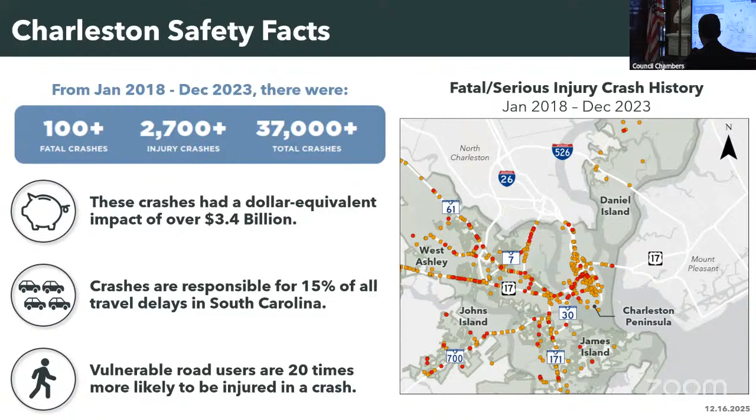You can see on the map there, that's not all crashes, that's just the fatal and serious injury crashes that occurred within the city over that 6-year period. The map is pretty well saturated with dots, which really speaks to how large of an issue this is for the city. Just to add, in 2024, since we hadn't studied that period as part of the plan development—since we started developing this plan last year—an additional 81 people were involved in fatal or serious injury crashes across the city.

Back in October, I think it was, the city passed a Target Zero resolution, which aligns with SCDOT's broader vision for eliminating fatalities and serious injuries statewide. That commits the city to substantially eliminating all fatalities and serious injuries by 2050.

So what we did through the plan, to wrap it into a nutshell, first off we reviewed the state of safety in Charleston, which is what I just got finished summarizing. That's taking crash history and providing a summary of what we're seeing, where we're seeing crashes occur, and what the severity of those crashes are.

Using that data, we defined and narrowed in on the high crash and high risk locations. We know that crashes are occurring everywhere, but where can we get the most bang for our buck in investing in safety improvements across the city?

After identifying those locations, we identified a short list of safety countermeasures to ultimately feed into, as James mentioned, future applications for additional funding through various programs through USDOT, as well as other programs across the region, such as the transportation sales tax that'll be back on the ballot again, and other programming efforts.

And developing a plan for implementation is the last piece of what this plan does, and that's the most important piece. We don't want this to be a plan that just sits on a shelf. I know James said this is the last you'll hear of it. Hopefully it's not, because we'll then actually implement the actions and projects that were identified in the plan.

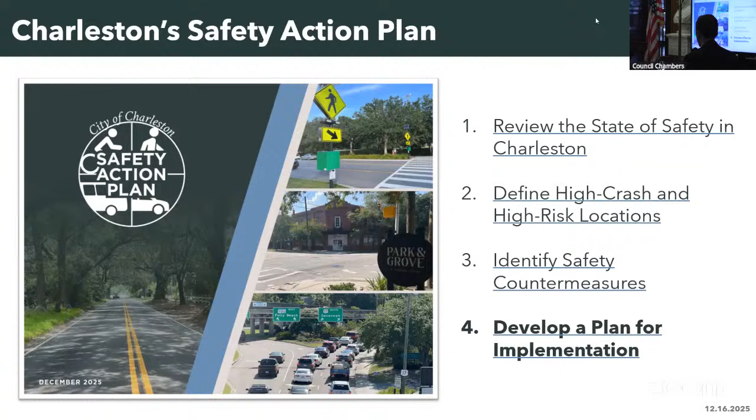The city has already applied for what we call a demonstration grant, which is a smaller amount of money to pilot some of the strategies identified in this plan at various locations across the city. We still haven't heard back from that. I think with the government shutdown and whatnot, things have moved a little bit more slowly than typical for USDOT, but everything we've heard on our end working with our partners is that those awards should be announced soon. So hopefully the city's in line to receive that funding. That'll kind of be the initial stages of getting some of these projects on the ground.

And then next year, there's one more round of funding available through this Safe Streets and Roads for All program that the city will then be positioned to apply for an implementation grant, which is actually the construction funding for these projects. The hope is also that this program will continue into the future.

That's not yet been established, but again, everything that we're hearing from our partners is that this program will certainly continue into the future. It's just how exactly that looks might be shifting with there having been an administration change since the program started in 2021.

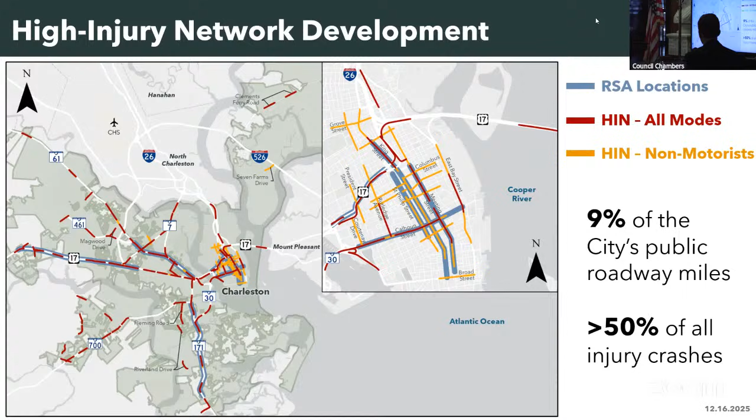And so that's the purpose of the recommendations that came out of this. Together, we've got 2 buckets of recommendations that came through the plan. We've got our engineering countermeasures, which are more of your traditional construction projects, things we need to go out and build to improve our roadways and our pedestrian and cyclist facilities. We've got 52 of those projects at various locations across the city recommended as part of the plan.

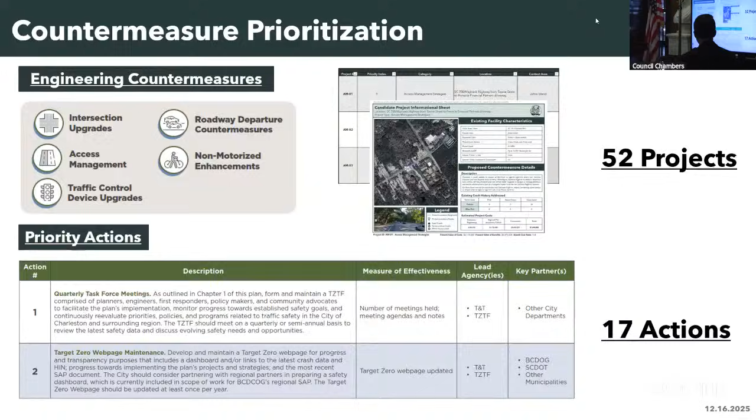So just to provide one example, the plan will be publicly posted online, so anybody will be able to access the entire document, which will summarize all of this in detail. But just to provide one example, and I chose this because it ties into that demonstration project that the city is already pursuing funding for.

Some of the locations that fell out in this category were pedestrian and bicyclist improvements on Magwood Drive and SC 61 in West Ashley, and then along the East Bay Street corridor downtown, as well as in the East Side, North Central, and West Side neighborhoods on the peninsula.

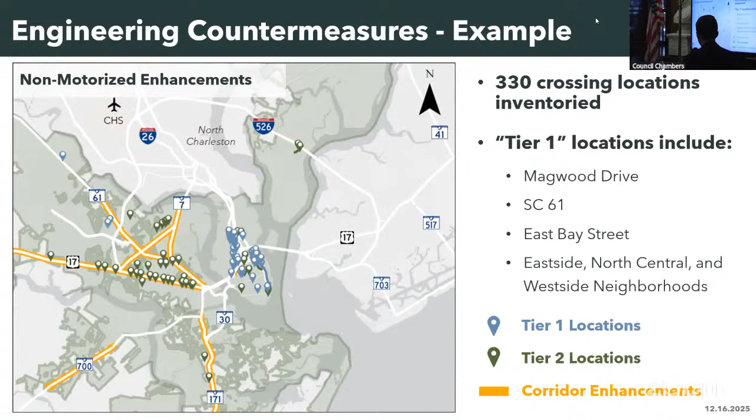And I think that last bullet is a few of those locations where the demonstration project is looking at improvements to pedestrian crossings. So in the plan, the way that it's arranged, if you were to review it, you would see just that.

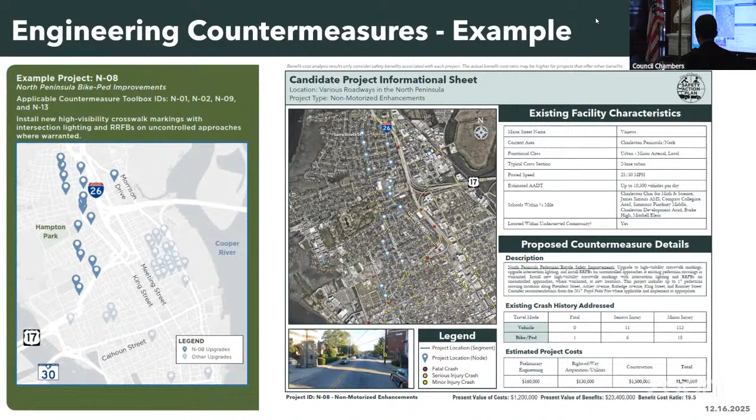You're not meant to be able to read this, but every single one of those 52 projects gets a sheet summarizing where it is, the crash history that's been experienced there, what the project is that we're proposing, and all of the costs anticipated as part of that project from design through construction, as well as a benefit cost ratio — what are we expecting to get in return for implementing this project?

So that's all I have for today. Any questions? Thank you very much. Thank you for your hard work on this. Any questions from any member of the committee?

Over the past year, we've been tasked with retiming signals, predominantly Maybank Highway and Folly Road were the two main corridors identified, but it also included Harborview Road as well as the Fielding Connector. In all, it was 30 traffic signals.

We separated into 7 corridors or areas: Lower Maybank in the bottom left of the screen, which is Maybank and Main Road and also Brownswood and Main Road, then the Upper Maybank corridor from River Road up to Woodland Shores, and then the 5 signals there we call them Folly Triangle.

It's a corridor there, which is the 5 signals at Folly and Maybank, and then your Windemere Triangle area where those routes come together, and then Fielding Connector with the 2 signals near Porter-Gaud, and then the Folly Road corridor, the longest one, from Fort Johnson Road up to Harborview Road.

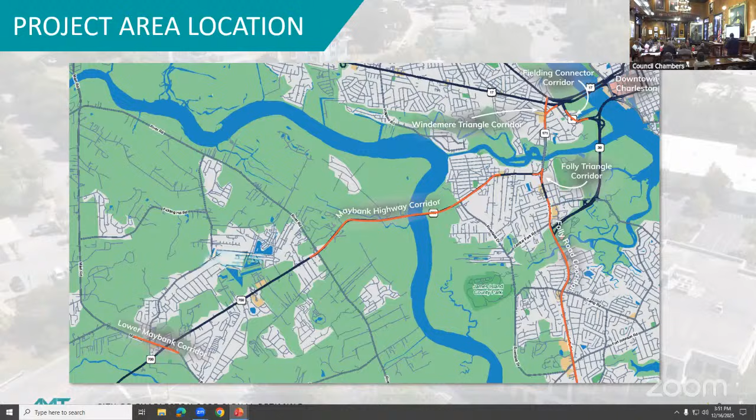The first thing is understanding the problem and understanding what our goals and objectives are. There's a similar list here that you'll see in a lot of other large capacity projects, which is improve traffic flow, reduce congestion throughout the corridor, decrease travel times, increase the average travel speed in a congested environment.

Obviously not above the speed limit, but when you're seeing low speeds because of congestion, we want to improve upon that and reduce delay — reduce how long you're sitting at those signals and throughout the corridor.

Retiming signals and coordinating signals throughout a corridor is probably the most cost-effective way of making improvements. If you compare it to large capacity improvements, which cost millions and millions of dollars, this is pennies compared to that cost. So it's very important to do this routinely.

I would say probably a 3 to 4 year cycle is the industry standard. So it was a much needed project within these corridors.

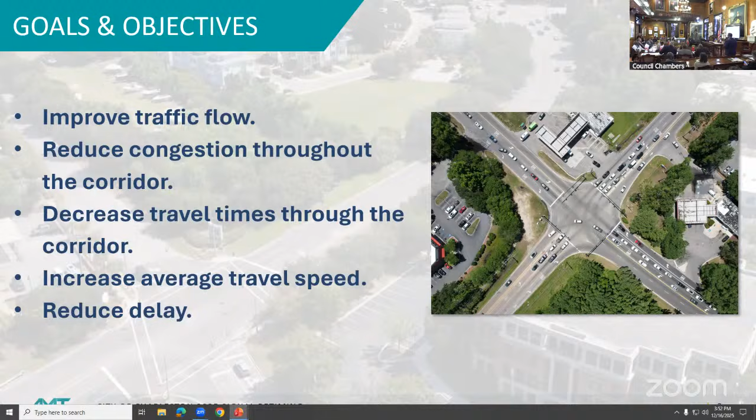As engineers do, data is what drives us. So the first thing we did was office data collection — understanding what data is readily available.

We researched and analyzed development reports for different developments along each of the corridors, such as traffic impact analyses, identifying compounding features such as the Wappoo Cut Drawbridge that impacts the Folly Road Triangle, large traffic generators coming into play, and complicated intersections.

Obviously Maybank and River Road and Fenwick — these are complicated corridors. These were not easy corridors to retime and coordinate. And then it's collecting all of the available signal plans and the controller data that's out there.

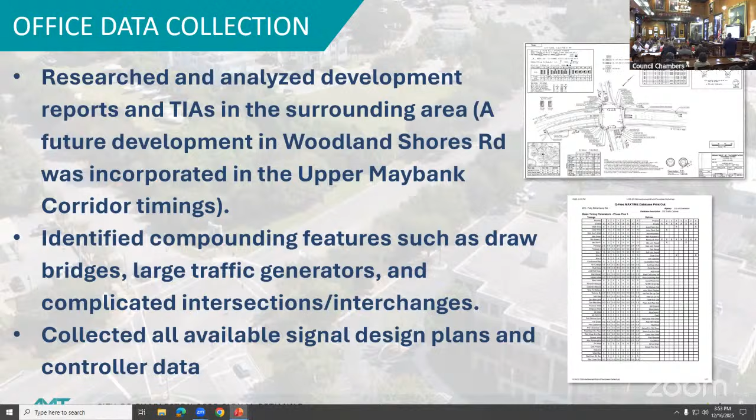Then it turns to the field data collection process, and this is where we did a lot of work. Our technicians and engineers within our office were able to go out and go through the controller boxes.

This is an opportunity for us to look at the operations, understand if there's hardware that needs to be replaced, or faulty things. We're able to do an assessment of the current conditions and provide recommendations for improvements.

We collect turning movement counts at the intersections. We do travel time runs throughout the corridors. And then one of the things we do is collect drone imagery at the corridors.

This is an opportunity for us to get a bird's eye view of that intersection, but also the other intersections upstream and downstream. We're able to see how traffic progresses through those signals and along the corridor — is it working currently, or not? How can we improve there?

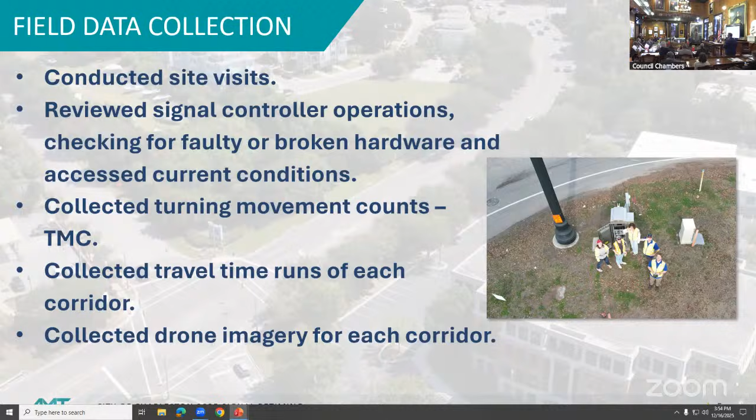The signal timing process itself is a bit iterative — this is the FHWA chart here, but we all do it kind of similarly, with some uniqueness to our process. It's really an iterative process.

We do the data collection, and then use that data to create models, and that's where we use a lot of the drone imagery as well, those videos, to really calibrate our models so we know we have a very accurate representation of what you see every day in the field.

Then we develop traffic timing plans from that, and we go back and forth with modeled traffic timing plans until we feel like we have the best signal plan we can implement. Then we sit down with the city staff and go through that, have a go/no-go meeting, and decide whether we're ready to go.

And then it becomes time for implementation and fine-tuning. And that's where you get, I think, a lot of bang for your buck. We also, once again, use drone imagery and video during this implementation phase.

We'll have typically two folks in the field doing this. One's manning the drone while the other one is, I'll say, tinkering or fine-tuning, making sure that what we implement and making tweaks, we can see the impact of those tweaks in real time.

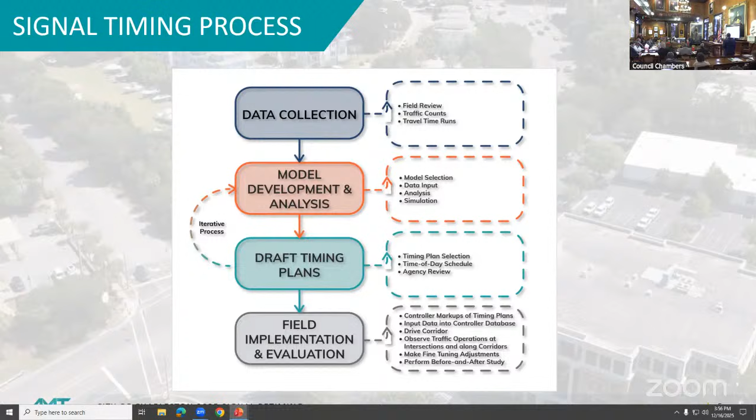So I'll dig into the results here. These are in alphabetical order. Fielding Connector had two signals there, the Ripley Point Drive and the Croghan Spur Road.

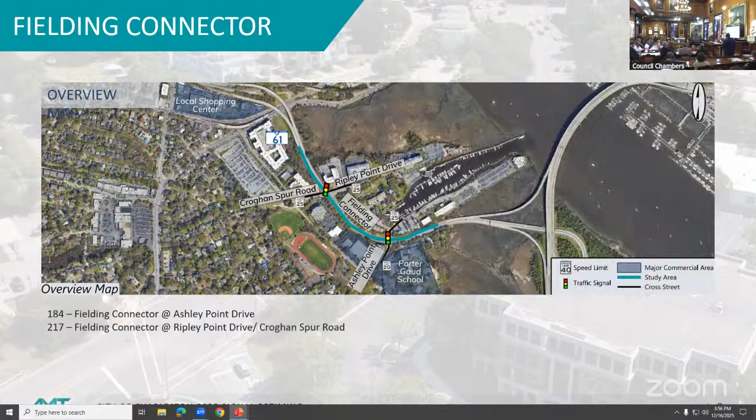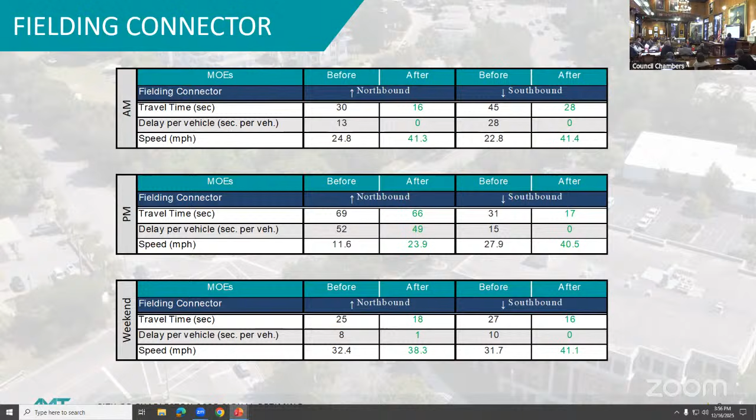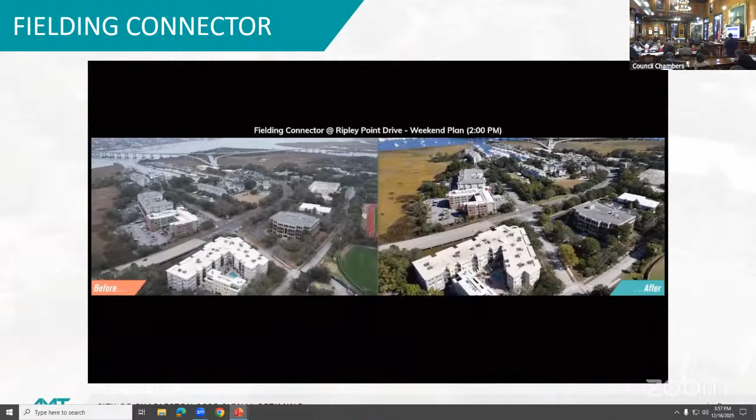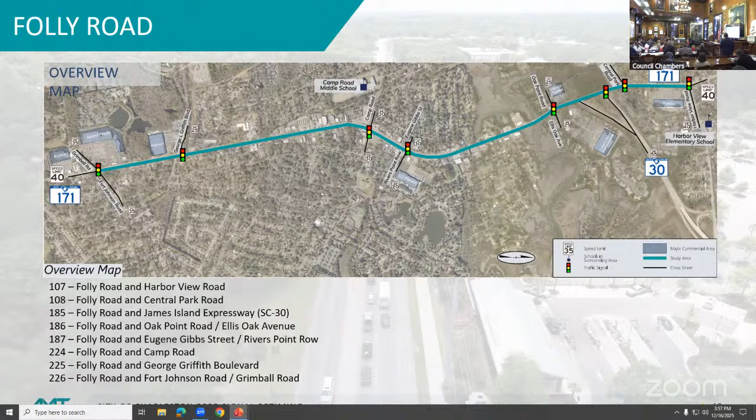Folly Road being the, let's say, the longest, had 8 signals along that corridor, like I said, from Harbor View Road up to, or down to, Fort Johnson Road. We also included the James Island Expressway, that southbound movement that you see there.

So you'll see some red here on the southbound movement along Folly Road. However, that was really more of a balancing of the traffic, not necessarily a negative. It's more of a balancing act between the travel directions there. But what it allowed us to do by giving some priority to the James Island Expressway was significantly reduce the travel time of that southbound left turn off the James Island Expressway.

So you just extended the time of the green light coming off the connector onto Folly Road? Extended the time, or reduced the number, or reduced the length of some of the cycle lengths. So it allowed us to phase through those quicker and push more traffic through.

And this one's an interesting one because you've got close proximity to each other. You've got Central Park Road, the James Island Expressway, and then you hit Ellis Oak. One of the recommendations we have in the report there at Ellis Oak is to change some of the signals. We've got protected left turns there at Ellis Oak that we could remove, and you'll find some more efficiencies within that Folly Road corridor as well.

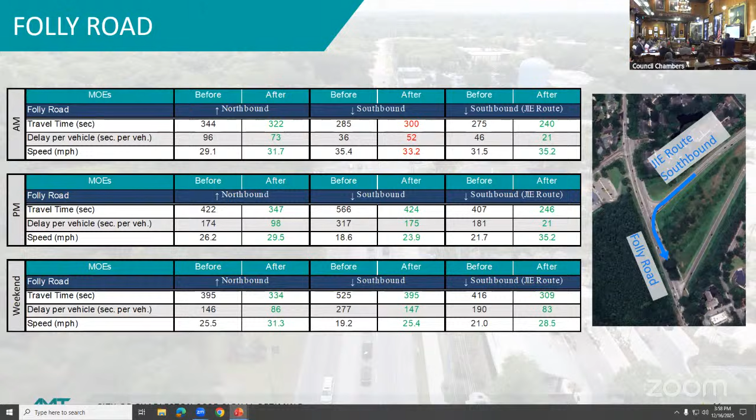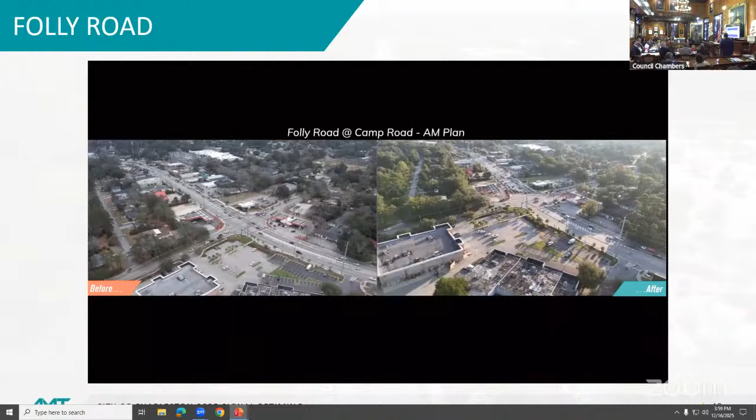This is the AM plan at Folly and Camp Road. And what you see here, you'll see that platoon of traffic that just left Camp Road along Folly. They'll continue to progress past Rivers Point Row and beyond without that continuous stop at each of the intersections.

The Folly Triangle, and this is why I'll give some credit to Tarcisio. This was his baby, and this was a complicated five-signal interchange, if you will. It's like Dante's Inferno. I mean, how do you get in and out of there? Tarcisio was able to squeeze out a lot of efficiency out of this intersection, this interchange.

He made some tweaks there. We've done a number of things, and it's also been impacted by the closure of Central Park Road. There's a lot of traffic that makes a right off of James Island Expressway, left on Central, all the way down to Riverland Drive.

And so during the time of that closure, this area here, Maybank, got a lot more traffic. And now that it's open, I think it's starting - James and I were talking about this before - it's starting to see a shift back to Central, but not as much as we expect it will in the future.

So Central Park Road's closing up again, right, after the holidays? It's open now for good? Oh, open for good, wow. All right.

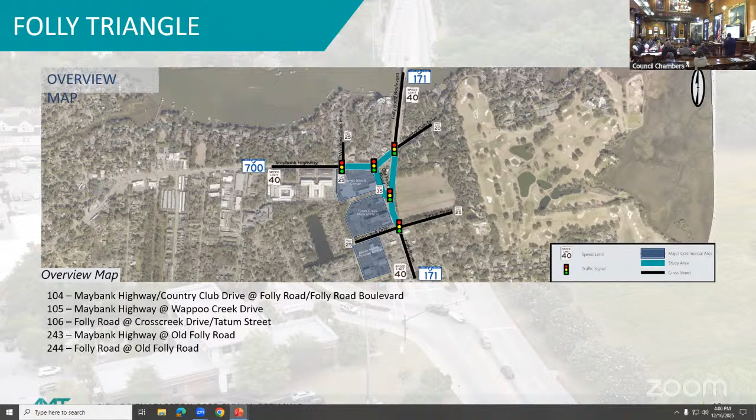So we've got what we did here. You'll see some red. Going to give you the same warning, 5-minute warning.

All right, so Folly Road, you see a little bit of red here. Once again, this is more balancing and prioritization given to Maybank Highway. And so you'll see improvements there on Maybank, as well as Old Folly Road. But overall, the interchange there works much better.

Historically, when I've come this direction, you see a pretty large backup heading northbound on Folly. I would see a lot of backup there at Tatum Street and through that intersection, and all of that's been alleviated now. So there's a number of improvements there. Old Folly Road seems to be working much better than it did in the past as well. So overall, we feel like we've successfully retimed this interchange.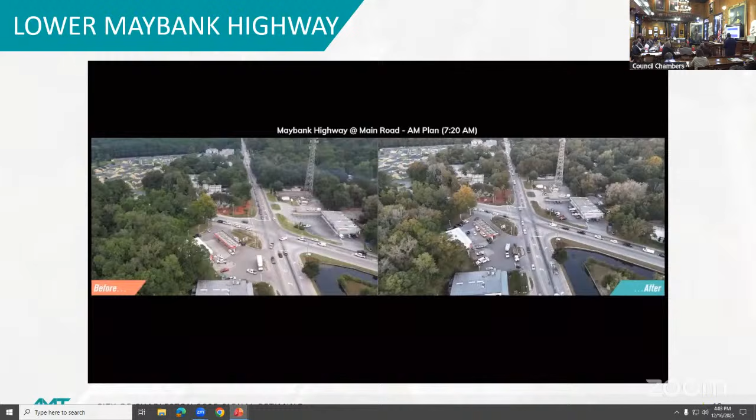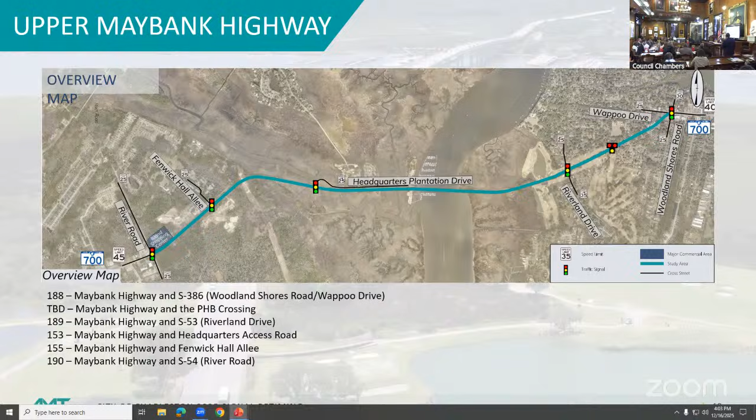Upper Maybank Highway, and I'll say this was the most complicated because it includes River Road and Fenwick Hall. So we did our best here to get these signals in the best condition we could to move traffic along the corridor, which overall the results turned out really well.

Maybank and River, Maybank and Fenwick was very complicated. And I'll say this is where signal timings versus capacity improvements we're hitting our limits on what you can do from a signal timing standpoint. And you really, this is an oversaturated intersection that needs to be larger. It needs to have better, it has to have some improvement.

The interaction there with the right turns off of River Road, the left turns off of River Road, all the turns, all the movements, it's complicated, it's congested. It's the interaction with Fenwick Hall, right?

So we move quickly from these two intersections to concentrate on, all right, how do we get folks out of there? Once they're out of there, how can we progress them through all the way up through Woodland Shores? And that's where you see a lot of good results here, and you see some good green numbers on the travel times, like the westbound 609 to 535. So we saw some significant improvements there in travel time and speed, which is great.

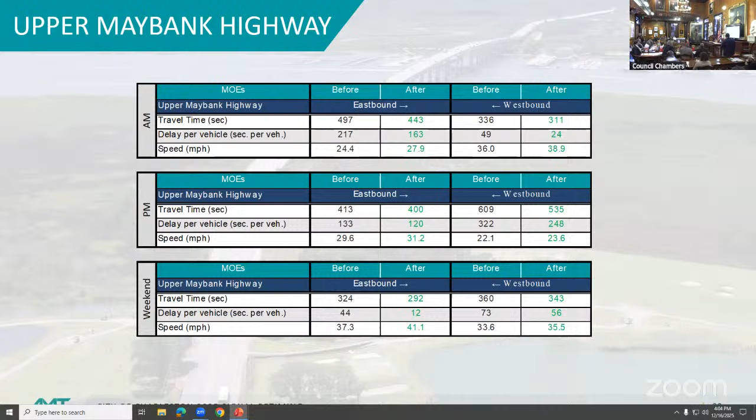This is the noon plan at Maybank and Woodland Shores. It's a good progression there through those signals. And I'm running short on time, so I'm going to move on.

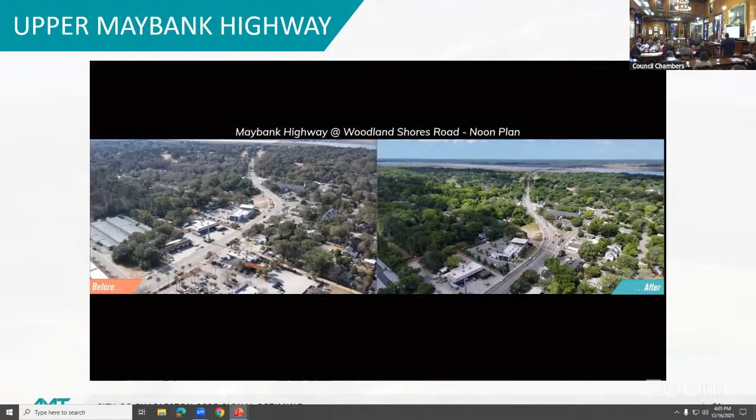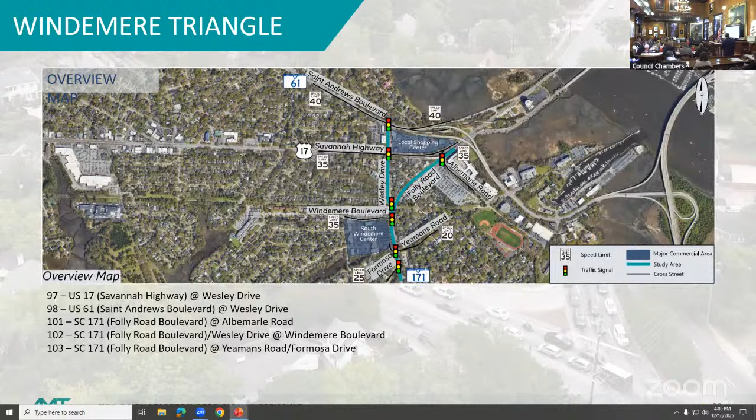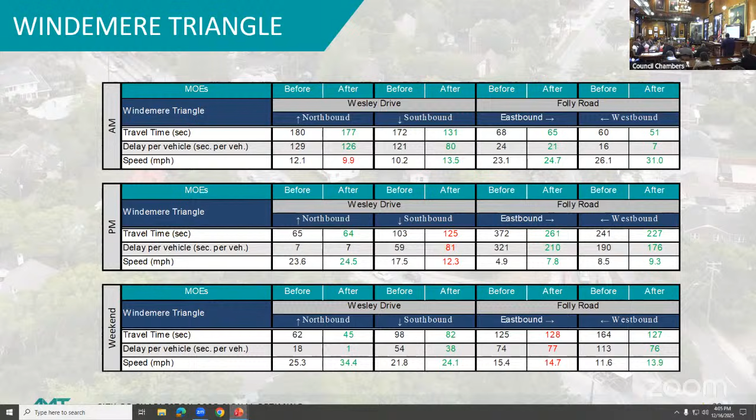Windemere Triangle, another very complicated area of the city, and its interaction there with St. Andrews Boulevard, Savannah Highway, and Windemere, Folly Road Boulevard up to Albemarle Road. And so a lot's going on there. So we worked hard there to make some improvements. We saw some improvements. You see some balancing there between the reds and the greens, concentrating on the corridors, concentrating on Folly Road. So significant improvements once again, but definitely a balancing and a kind of a give-take situation.

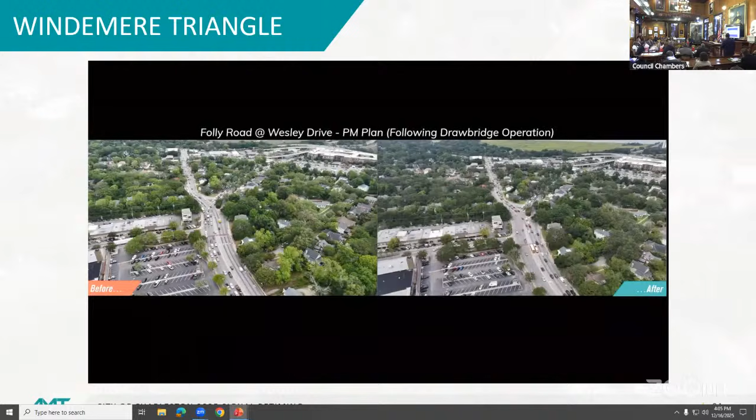Moving on. So what I touched on earlier was when we were able to go through these, we're able to understand how they operate today and what improvements need to be made, whether it's some of the things we found in the field or some of the things we found during the analyses of each of the intersections and corridors.

So some of the things generally throughout is replacing what we call the doghouse, the 5-section head, with the 4-section head, installation of blank out signs, prohibiting right on red during the pedestrian movement, installation of new vehicle detection. I know the one at headquarters has been a bit of a pain for you guys to maintain since initial installation.

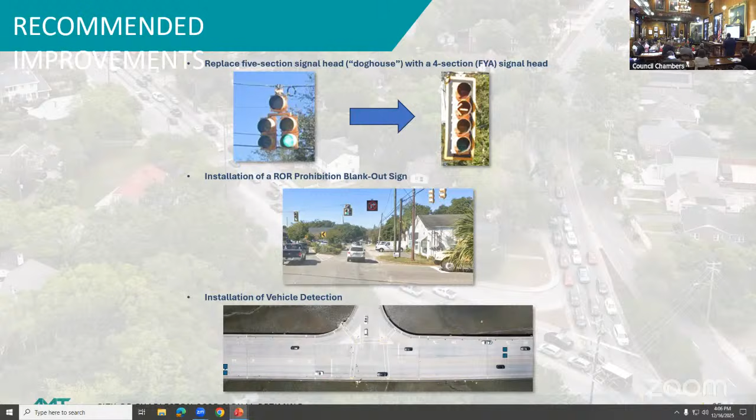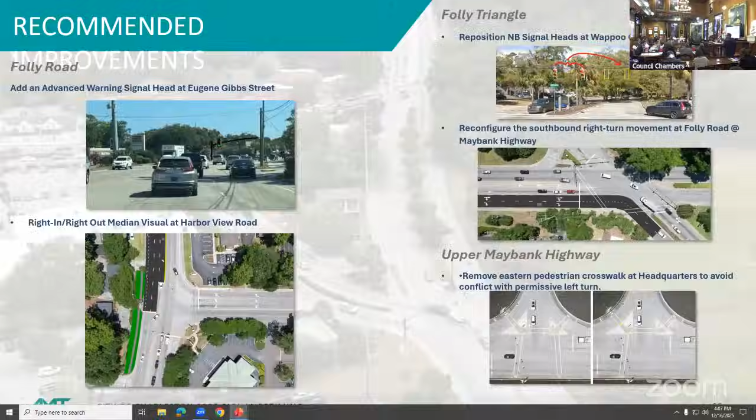All right, thank you very much. Super interesting. I get it, we need more capacity, but in the meantime this really does help us with our traffic flow in some really difficult spots. Absolutely. So, any questions from the committee?

Quickly, please. So this is the AI — is that the timing for the lights, correct? AI structure, no, not really. We're using drone imagery, and our guys are watching this, utilizing this drone imagery for calibrating. I wouldn't say AI, we use traffic models. Yes, actual intelligence.

So from here on out, is there still adjustments being made based on traffic flow, school in session, school out of session, things like that? We did all of our adjustments while school was in session. But as the population grows and changes, what is the structure of this contract for your support going forward, or is it done? As our current scope of work, we're done. He was saying we need to do this every 3 to 5 years. Redo it. Got it. Got a good baseline.

AMT intelligence. Thank you. Awesome. Appreciate it. All right, who do we have next? Mr. Pullman, I think you're up next.

The overall goal was to provide pedestrian pathways on each side of Sam Rittenberg Boulevard to improve crosswalks for pedestrian safety. As Safe Streets for All mentioned earlier, Sam Rittenberg Boulevard has a high amount of pedestrian injuries and fatalities along it. In addition, recognizing this is a major thoroughfare, we also have to balance safe ways to allow vehicular movement around this area. With that quick introduction, I'll turn it over to Stantec.

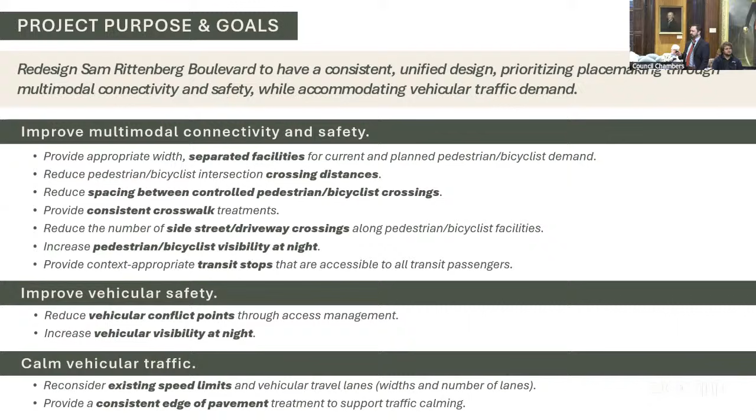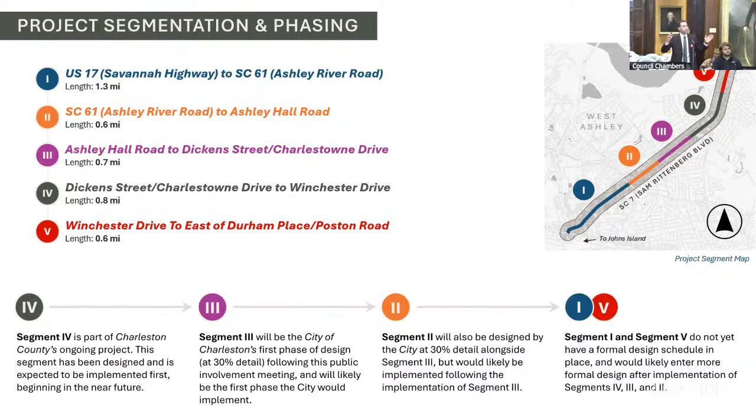Moving forward first is that green segment, section 4, which is what Charleston County is doing near the Ashley Landing development, so that'll move forward in the near future. With this project, 30% plans will be our next phase after we move past the concept development portion, for the section between Ashley River Road and Charlestowne Drive. So those will be our first two segments to move forward with plans, followed up later by the portions on either end at a future date.

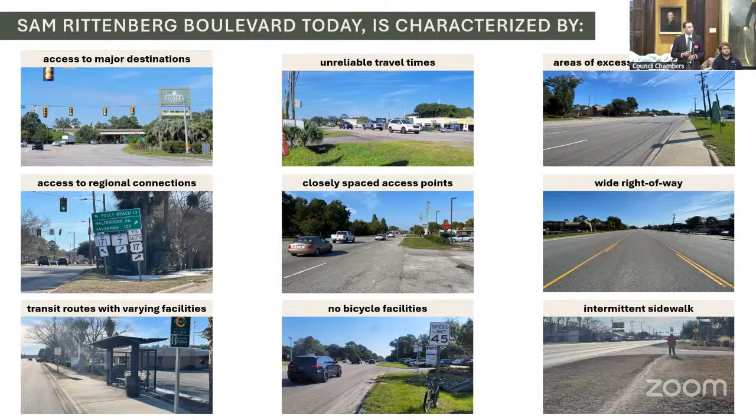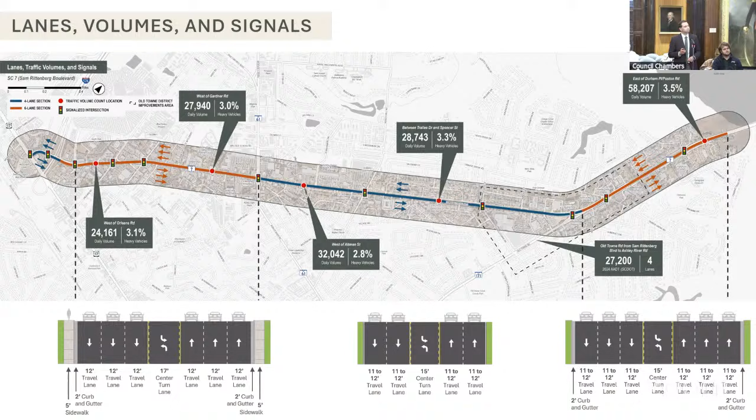In terms of speeds, we did a detailed speed study because that was a big emphasis for this corridor. It's posted at 45 miles per hour through most of the corridor, but those 50th percentile, or average, speeds range from as low as 35 in some areas to 44 in others, and the 85th percentile ranges from 43 to 50. Those two thresholds are really what we look at when evaluating the appropriate speed limit along the corridor.

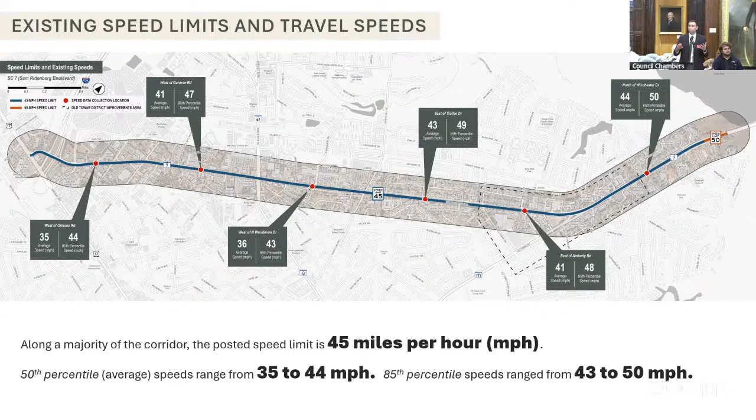In terms of crash history, we looked at the corridor in a number of different ways. Overall, over the past 5 years through the end of 2024, when the data was available, there were over 2,000 crashes, which is over 1 a day on average. And in terms of fatal and injury crashes - that's why there are all those law offices over there.

Right, sorry, no problem - made a traffic engineer laugh. That's like a first in 16 years.

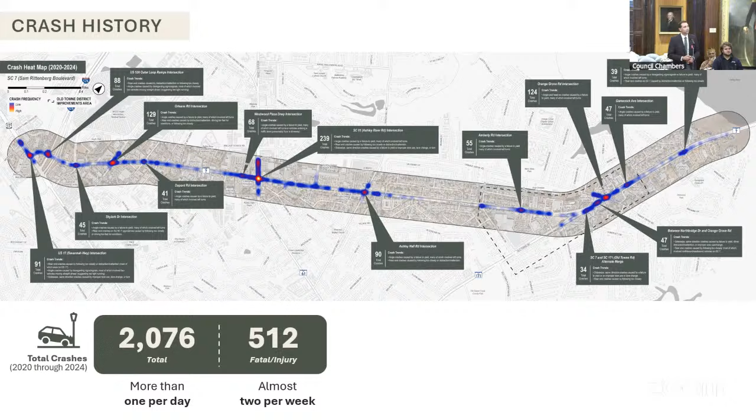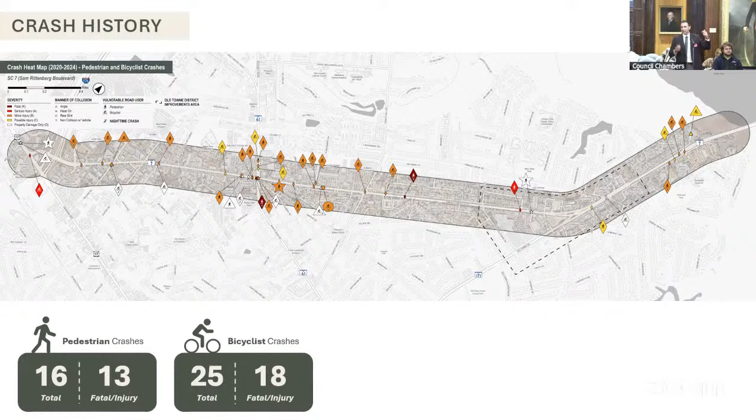We do have a sense of humor sometimes, but over 500 fatal or injury crashes, which is almost 2 per week, so certainly it's impacting this corridor almost every day, and from a severe crash standpoint, almost twice a week. So certainly something we wanted to address with this study. We also wanted to look at pedestrian and bicycle crashes - obviously not as many crashes on the corridor, but they frequently lead to either a fatality or an injury as a vulnerable road user. This was an emphasis area for us, as Eric mentioned, and we wanted to pinpoint where, why, and how those crashes are occurring so we could address them along the corridor.

We always like to have a baseline with existing conditions, but also look at the future if we were to do nothing in terms of geometric improvements. We wanted to look at what's coming along this corridor from a development standpoint, so for our future volume projections we looked ahead all the way to 2050. We looked at background growth in the area, but also some of the major developments we know are coming, including the Ashley Landing development on the northeastern side of the corridor, and the Epic Center at Citadel Mall, which has significant redevelopment opportunities. We had traffic studies completed independently for those areas and filtered those volumes into the network to make sure we're accommodating future traffic demand.

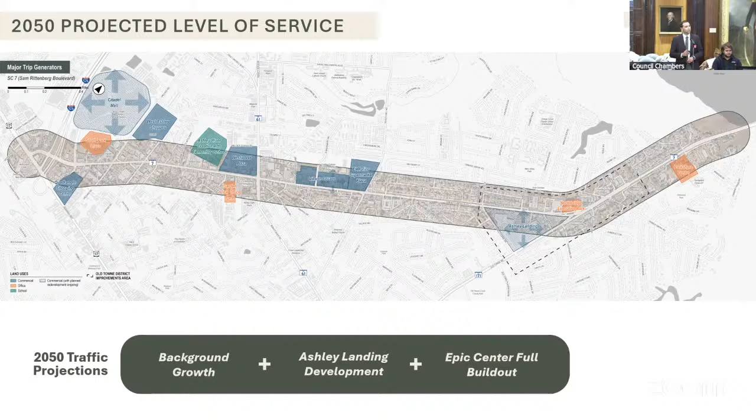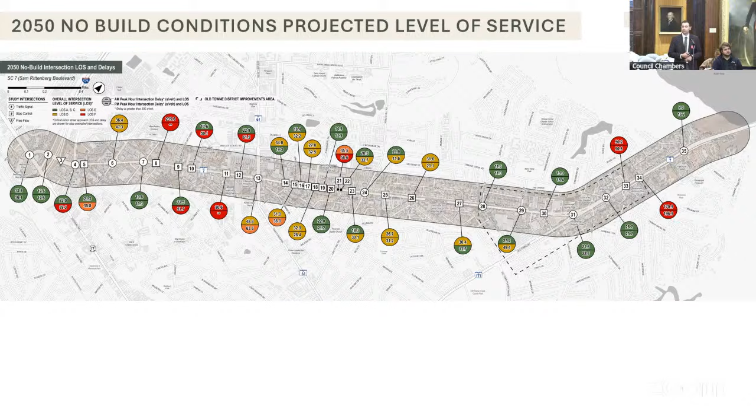As traffic engineers, we do love our colors - green is good, and as you get to orange and red, those are where you're experiencing higher delays. This is the no-build scenario, again if we do nothing from a geometric standpoint. What we're seeing is many of the stop-controlled intersections currently experience, and are expected to continue to experience, even worsening delay, and you also see some delay at the signalized intersections as well.

And then I'll show a similar graphic as we move into some of our future build conditions. So what we're recommending along this corridor, there are really three main buckets: roadway and access management related improvements, intersection improvements, and multimodal facility improvements.

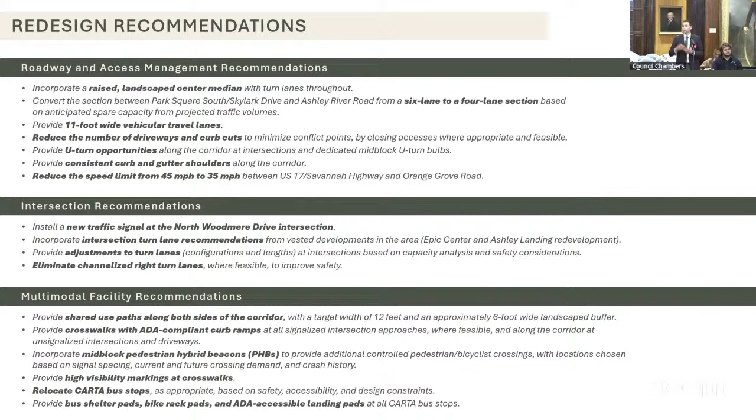From an access management standpoint, one of the big ticket items is a raised and landscape planted median through much of the corridor. In addition, we'd have U-turn location opportunities as we restrict those movements, but we'll have median breaks for left turn movements as well. It's really about choosing ideal locations for those access points, as opposed to open free access as there is today, to improve safety.

We also have, in that 6-lane section along Sam Rittenberg that I mentioned, converting that to a 4-lane section between Ashley River Road, SC 61, and US 17 because of that available excess capacity, and really using that right of way to give ourselves some of those multimodal facility improvements.

So the plan anticipates a shared use path on both sides, and we're targeting 12 feet, which is quite wide for a shared use path. That's the target through the entirety of the corridor, to have paths on both sides. We also have some additional signalized improvements, a new signal, and some additional crossings for pedestrians where those signal spacings are a little more distant, to provide another mid-block opportunity to cross.

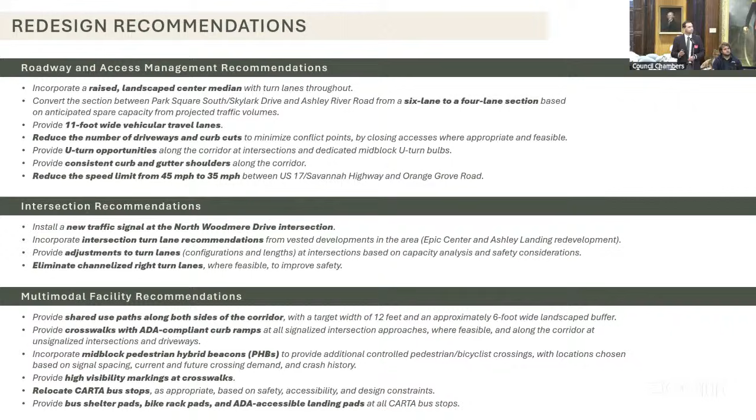And the goal here would again be to plant those medians and street trees and have an additional traffic calming effect, but maintain capacity for the vehicular demand that we've got there.

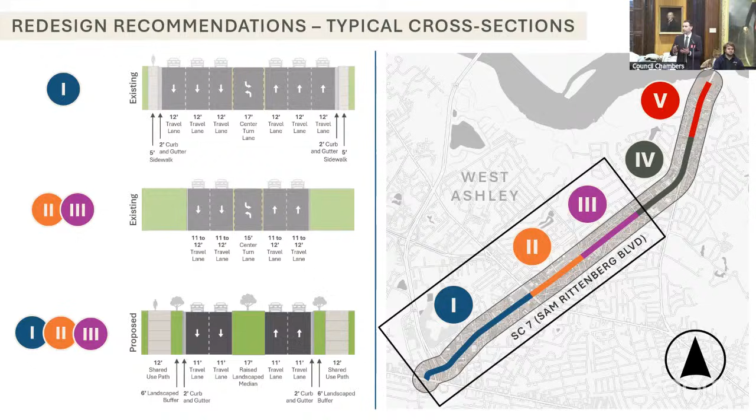Then is all turning activity at a traffic light as opposed to from that middle median? It's the left turns coming out of access points that are at signalized locations, but we do have breaks for left turns in, because that movement's typically a little safer to make. So we have dedicated points, and I'll show an example of that in a second.

So I'm skipping segment 4 just because that's been designed by the county, but that would be a similar cross section to what we have at 1, 2, and 3. And then segment 5, of course, we're not anticipating changing capacity here -- it certainly needs all the capacity it can get in this area, given the high traffic volumes. It would just be, again, the access management and an additional side path on both sides in this area.

And it needs a new bridge. It does -- just put that in there on the top, please. Segment 5, new bridge. Yeah, we can accommodate that.

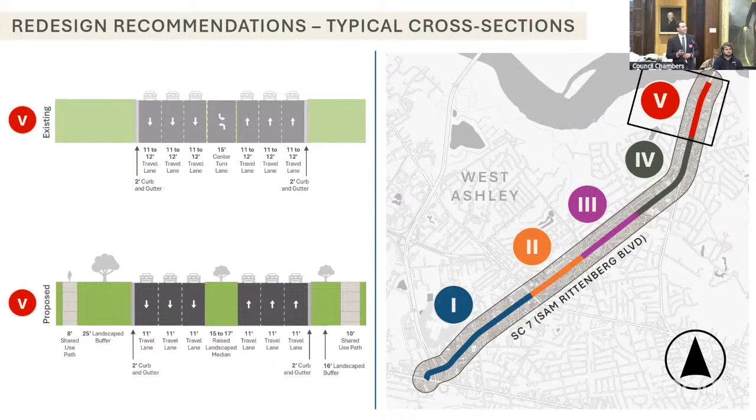So I don't have time to go through the entire concept, but I did want to show a representative view -- this is section 3, which would be what we'd attempt to move forward with first. The goal with moving forward here first is it's a little bit of a simpler area. There's not as much access today, so we can hopefully build up some steam for the project and move this segment first.

But I did want to mention, as you can see in the green in the middle, that would be the landscape median. Hopefully you can see some examples of those breaks where we're allowing left turns into some of the major cross streets or major driveways. And then we have locations for U-turns on either side of where we're restricting access, so that we give folks an opportunity -- if you can't turn left out, you can take a right and then make a U-turn at a dedicated location.

And then in the middle of the corridor there is one of the new pedestrian hybrid beacons, the crossings for pedestrians, because these two signals at Ashley Hall and Charlestowne Drive are pretty far apart. So if you're a pedestrian trying to cross in the middle, you'd have a long way to go, a circuitous route -- so this is another opportunity to cross in the middle there. This really demonstrates what we're attempting to do on the entirety of the corridor, but I just wanted to show this as an example.

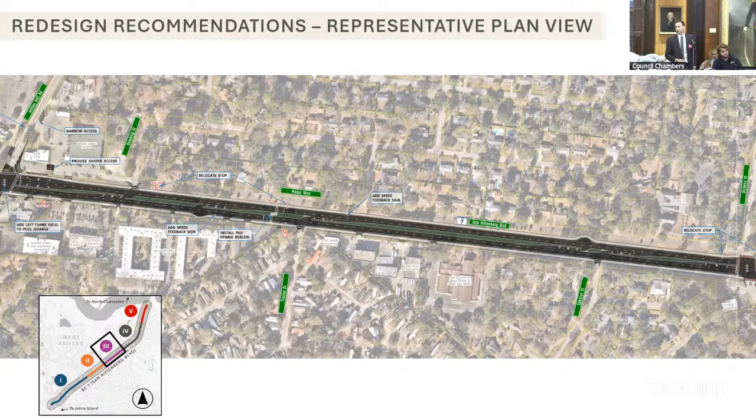And what's not shown up in the level of service is the impact of the raised medians. I just want to mention this related to the travel time reliability of the corridor. Obviously our goal is safety, but it also has an operational benefit. So if you have fewer crashes, you have fewer delays related to those crashes. And so the raised medians help you in that regard as well.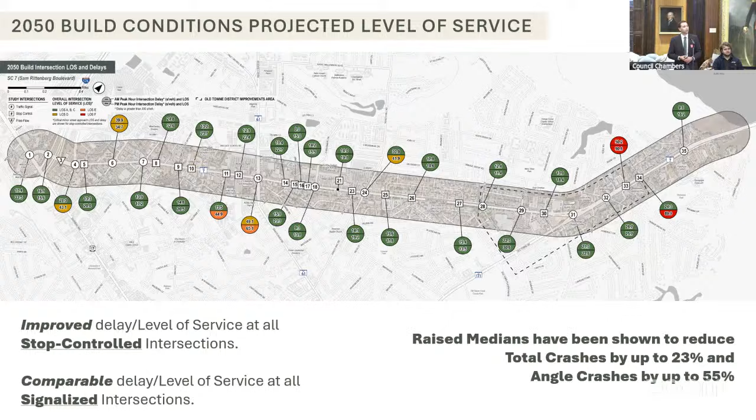All right, thank you very much for that presentation. Much like the others we've had today, it was excellent. Any questions from any member of the committee on the recommendations?

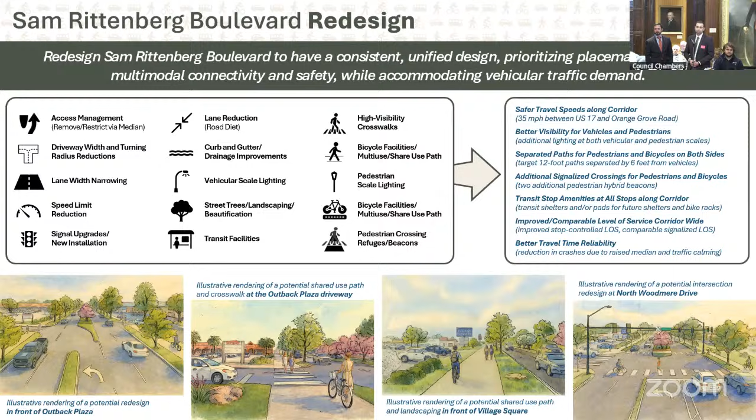You said you had a public meeting recently on this, last Wednesday, and how'd that go? It went well. We had good attendance, upwards of 80 folks attended. And then we've got an active online survey as well right now.

Great, okay. Any questions, comments? Thank you very much, appreciate it.

All right, next. Oh, I think before we go to the next, I probably missed an item here on number 3. We probably need to get a motion and a second to adopt the safety plan. Got a motion, a second. Any discussion? All in favor? Aye. Any opposed? The ayes have it. Now let's go implement it.

All right, next, Mr. Mathis, Old Towne Road, Sam Rittenberg Maintenance Agreement approval. Yes sir, this is a standard maintenance agreement between City of Charleston, the SCDOT, and CARTA regarding the Charleston County improvements that will take place on Old Towne Road as well as Sam Rittenberg. This is a project that's been going on for a while. Again, a standard agreement, and our legal staff has reviewed, and everything seems to be in order. So, move for approval. Motion made and second. Any discussion? All in favor? Aye. Any opposed? The ayes have it.